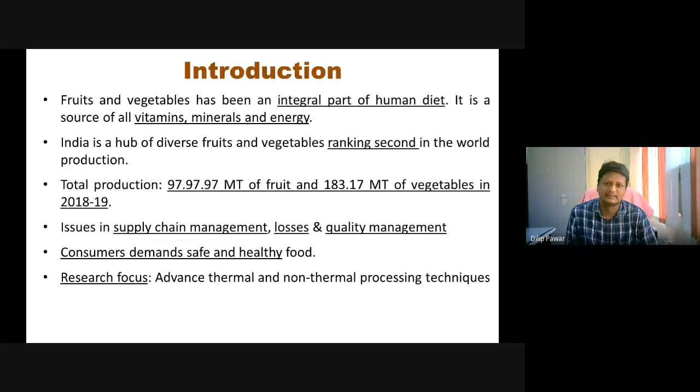In fact, this third sector of processing has gone to the quaternary level of processing, that is, extraction of high-value compounds from particular fruits and vegetables. And another sector can be waste utilization. This is the broad sector right after harvest where the fruit or vegetable can go.

Now, our topic of discussion is the business opportunities. As far as primary processing and the fresh consumption of fruits and vegetables is concerned, what are the business opportunities? One term is the cold chain. You might have heard about it. It is one of the projects, and I have some slides particularly on the cold chain. So there is opportunity in the cold chain. It includes the pack house, ripening chamber, cold storage, and storage at ambient temperature as well. So in the fresh consumption sector, one can have a business entity in these, that is cold chain, pack house.

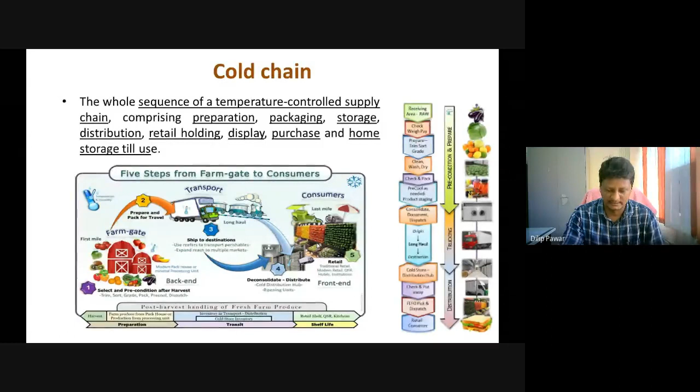Now, this is one scheme under PM Kisan Sampada Yojana. There are different types of schemes. You might have heard about them; some of you have been involved. Some of the schemes are Mega Food Park, Integrated Cold Chain, etc. Mega Food Parks have also been successful; many have been started. One of the schemes of PM Kisan Sampada Yojana is the Integrated Cold Chain and Value Addition Infrastructure.

This particular Integrated Cold Chain and Value Addition Infrastructure: the main objective is to preserve, to create infrastructure, to maintain the quality of the fruit throughout the supply chain, and to deliver safe food to the consumer. That's what it is all about.

As far as this cold chain is concerned, some of the operations are at farm level, as we discussed in the previous slide. Some operations are carried out at farm level, that is pre-cooling, weighing, grading, sorting, etc. These particular operations may occur at the pack house also.

Then there are the operations of multi-product or multi-commodity, multi-temperature storage, controlled atmosphere storage, packing facility, and individual quick freezing. This is a new concept, to preserve suitable fruit or vegetables by freezing them with individual quick freezing techniques. It also includes transport. During transport we also have to maintain low temperature, which can be done by reefer vans, mobile cooling units, etc.

So these are the components of integrated cold chain management, which was started under PM Kisan Sampada Yojana. The government is also giving subsidy, financial assistance, and training. I have some subsequent slides on that also.

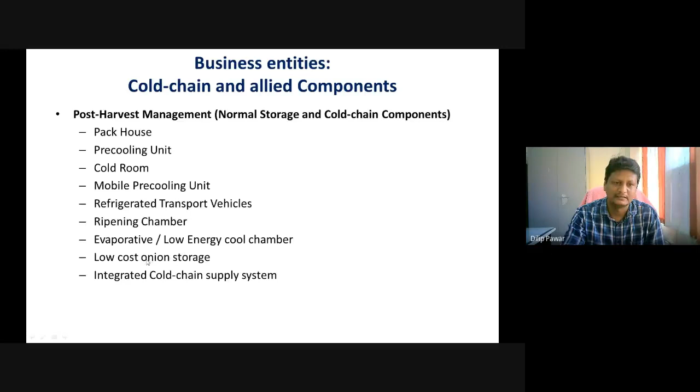These are the same components that we discussed in the previous slides. A business can be any one of these components, a collection of one or two components, or the entire supply or cold chain management. It includes the pack house, and I have some slides on the pack house also, pre-cooling, cold room, refrigerated transport, ripening chamber, evaporative cooling, low cost storage particularly for onion, or a combination of all these components.

So briefly about the pack house. We have the opportunity to start a business in the pack house also. A pack house can be started as a separate entity, or it can be integrated with the other components. A pack house simply means the operations carried out on fruits and vegetables right after harvest. It includes pre-cooling, washing, sorting on the basis of size, weight, color, length, packing, etc. So a pack house is the organized management of horticulture produce.

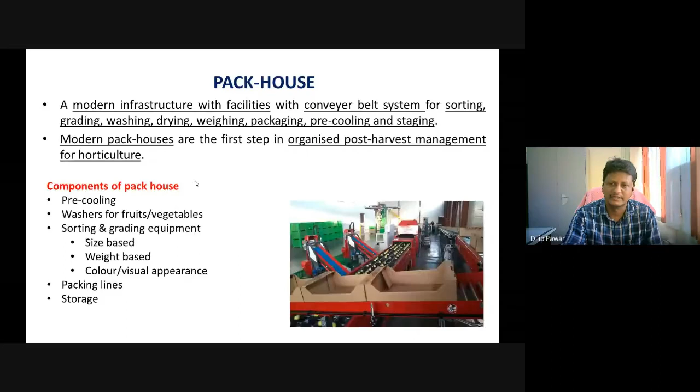Many advanced techniques are involved: automatic packing lines, weighing machines, sorting machines, etc. Many machines can be imported, and some are being developed in India also. We at CIAE Bhopal are involved in one project on the development of an automatic packing line.

So what are the unit operations taking place in a pack house, very briefly? First is receiving. Generally, if the production is our own, we can have our own produce, or one can procure it from the farmer. After receiving comes maturity assessment, then weighing, before packing and after packing.

It includes sorting. Sorting may be on the basis of surface defects that happened during handling, sorting on the basis of color, or grading on the basis of size. Many types of size-based graders are available, such as diverging roller graders and rotary graders, which are available in India also, but machines can be imported too.

Washing is also one of the operations of the pack house. Generally, washing has been done using chlorine. Chlorine is a disinfectant, but nowadays a good replacement for chlorine has come, called ozone. Instead of washing with chlorine, we can wash with ozone. So these are the operations.

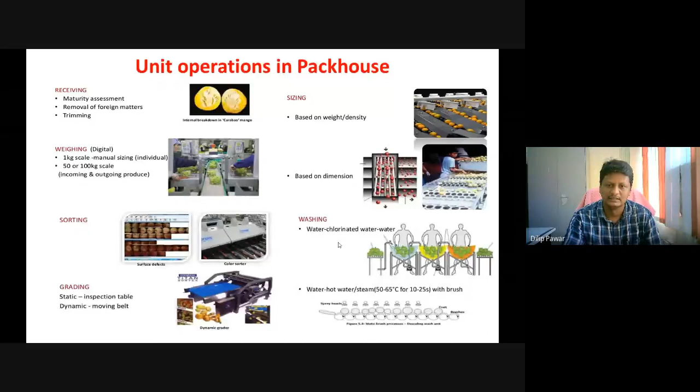Then waxing is the application of a coating over the surface of fruits and vegetables. You might have visited some industry or seen these operations. I will go somewhat fast through some of the slides, and later I have some slides on the technology developed on this aspect. Then conveying and packaging also. All these operations take place in the pack house.

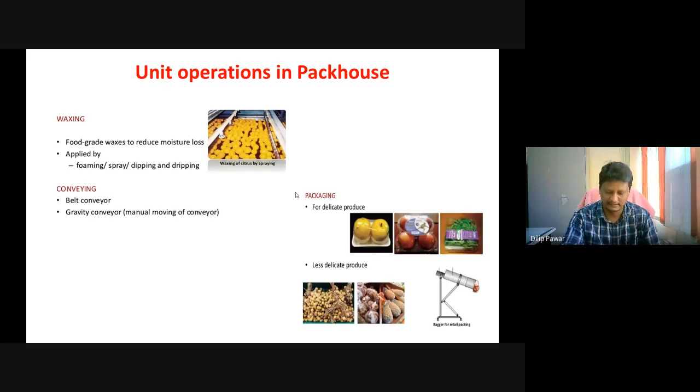At present, many pack houses are running in India. As per APEDA data, about 145 active pack houses are there in India. Mostly these pack houses are for commodities like grapes, pomegranate, chili, okra, and other vegetables.

Now, some of the unit operations related to this cold chain, or storage, I will be discussing. Pre-cooling we have discussed earlier. It means that right after harvest, the product has field heat, and this field heat has to be removed so as to extend the shelf life of fruits and vegetables. There are different methods of pre-cooling: shade cooling, room cooling, forced air cooling, hydro cooling, vacuum cooling, ice cooling, evaporative cooling. Shade cooling means simply that after harvest, if the farmer keeps the produce under shade or a tree, that is shade cooling.

Room cooling and forced air cooling: some industries are also providing such types of cooling systems. Room cooling, forced air cooling, hydro cooling, washing. Ice cooling is also being followed, particularly in the pack houses we discussed earlier. So pre-cooling is a very key treatment in extending the shelf life of fruits and vegetables, because we are discussing primary processing of fruits and vegetables.

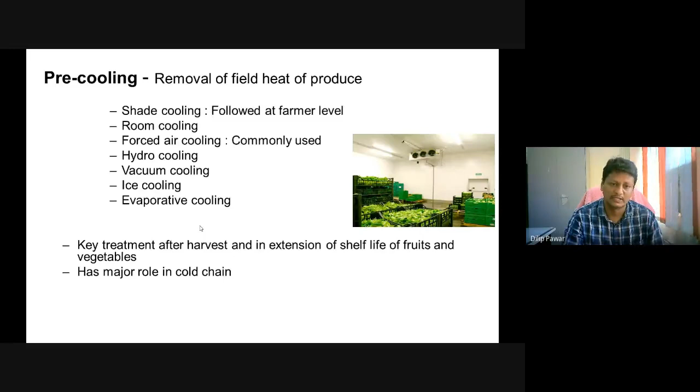In primary processing, most of the activities are about how to keep the quality, or how to keep the fruit or vegetable intact as it is. So what are the possible treatments we can give to the fruit and vegetable so that it can remain as intact or as fresh as possible? So pre-cooling is also one of the components of the cold chain project.

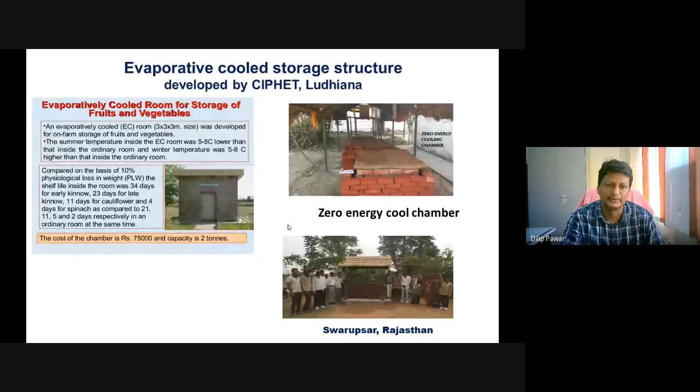Also, some ICAR systems or institutions have developed evaporative cooling structures. The left one has been developed by CIPHET, and the right one is the zero energy cool chamber developed by PUSA. These systems are also becoming popular. In fact, evaporative cooling requires tropical conditions like low humidity, high temperature, or high air velocity.

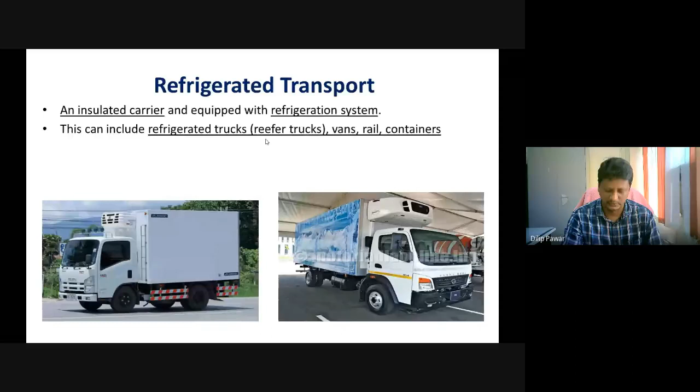Another component of this project, or the cold chain, is refrigerated transport. Refrigerated transport means maintaining the cold temperature during transportation also. It is an insulated system provided with a refrigeration system. It can include reefer vans, reefer trucks, rails, containers, etc. So very briefly, I am explaining what the components are. Then we will go to the next business entity.

The purpose is to have a holistic integrated approach in the supply chain, because at present our main topic is the cold chain. It is all about how to maintain the quality and the temperature for shelf life enhancement of fruits and vegetables throughout the supply chain. These types of technologies have been recently developed, so these are also important components of our project, or of the cold chain.

Now comes cold storage. Cold storage has been common for more than decades, and many cold storages are running. The purpose is to store the product for the off season. For example, we can store carrots in the peak period and make them available in the off season. It is generally long term storage, built as an inventory.

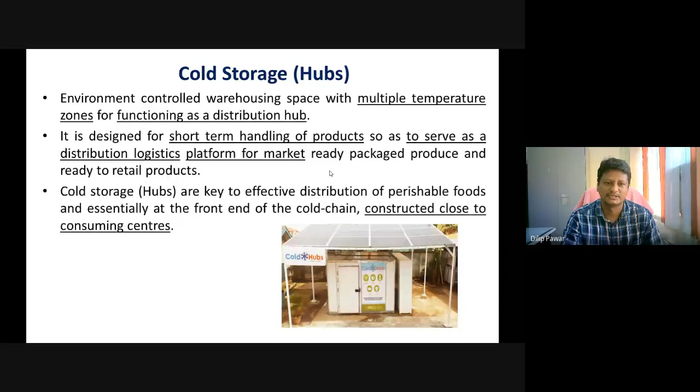Okay. Cold storage can be at center also, or cold storage at the hubs also. At hubs means at the distribution center. Very initially we discussed this cold chain: what is the process flow of cold chain? So this cold storage at hubs means storage at low temperature of the fruits and vegetables at distribution center, at consumer centers. So this is also one of the components.

Now, in general, it is recommended that there will be two possible business models in the cold chain. One is in the food supply and delivery system, and another is to hold the inventory in the off season. That is, this is simply storage, and this is simply supply chain. We can supply with having our own production, we can purchase and we can supply it by maintaining its quality. We can have the supply or trade of imported products also.

And another is simply storage. That may be cold storage or that may be ambient storage. For ambient storage, we have some other slides also; that time we will be discussing in detail. Now, as I very recently discussed, these are the schemes started under MIDH, Mission on Integrated Development of Horticulture, then Ministry of Food Processing Industries, MOFPI.

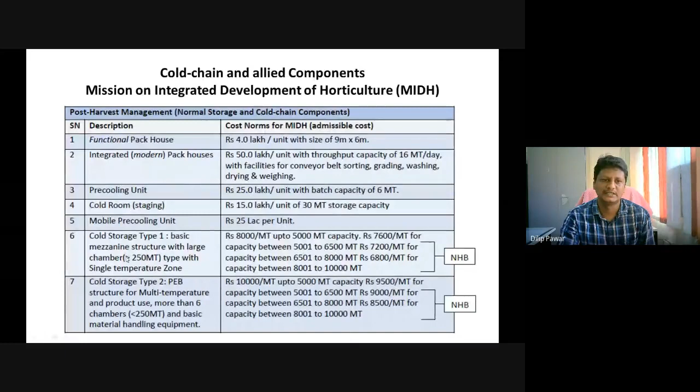So these are some of the cost norms. At left side in the second column, all these are the components of the cold chain, and they have also provided the maximum cost norms for a particular component and the possible subsidy for that. I am not going in detail of this, but such types of cost norms and guidelines have already been given by the MIDH and MOFPI also. It includes all these components that we have discussed in the previous slides: the pack house, pre-cooling, cold room, cold storage, different types of cold storage, different commodity cold storage also.

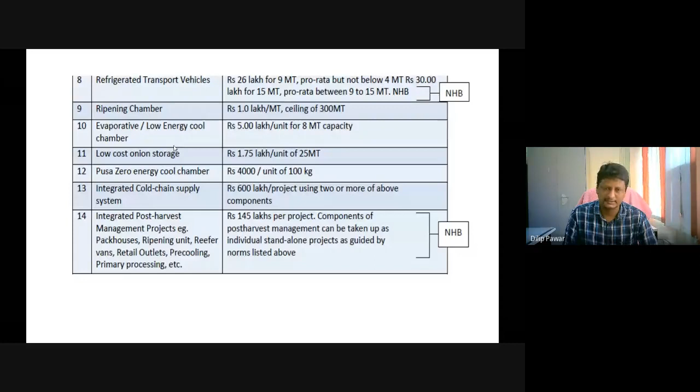One thing I forgot: whatever cold storages are there in India right now, most of them are single commodity cold storage. So nowadays the focus is on development of multi-commodity cold storage, because that is important. We have to have multi-commodity to make the business viable. It includes ripening chamber also, zero energy cool chamber also.

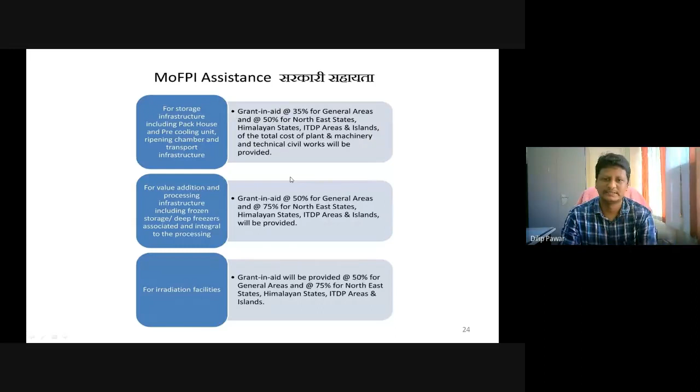Most of the components that we have discussed in the previous slides have been considered in these schemes. And there are different norms for the subsidy. Somewhere it is given about 35%, somewhere about 50%, 75%. So I am not going again in detail of the amount of subsidy. All the guidelines have been given by the MOFPI and by the MIDH also.

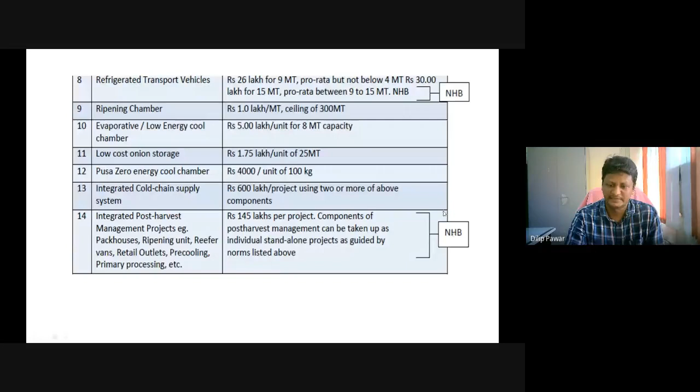Now, NHB, National Horticulture Board, is also handling some of these projects, because these are the slides where NHB is written. These projects are handled by the National Horticulture Board for providing the subsidy and providing the training. National Horticulture Board is providing training to entrepreneurs on two aspects. One is cold storage: cold room, cold storage, ripening chamber requirements. And another is PHM, primary processing of fruits and vegetables, that is mostly pack house activities. Now at present, NHB has approved 4 centers.

One is at CIAE Bhopal for training center. One is at CIAE Bhopal. One other is at CIPHET Ludhiana. One is in Baramati KVK also. And one is, I think, in Pune. Okay, so NHB suggests us to conduct the training to the entrepreneurs in these 2 projects.

One is PHM, cold room, cold storage, ripening chamber, requirement. Our theme is like that only. And another is the PHM, primary processing of fruits and vegetables. So we conducted our training recently in the month of February, from 17th to 22nd. We have conducted 1 week training. About 13 participants participated in this training.

All were entrepreneurs. Some of them are already having the cold storage, and they were in a position to expand the facilities. Some were very new, graduates, postgraduates, interested to come into the business. So we have successfully completed this training particularly on the cold room, cold storage, ripening chamber, and requirement. So this is one of the activities related to the business, and this is one of the activities of our

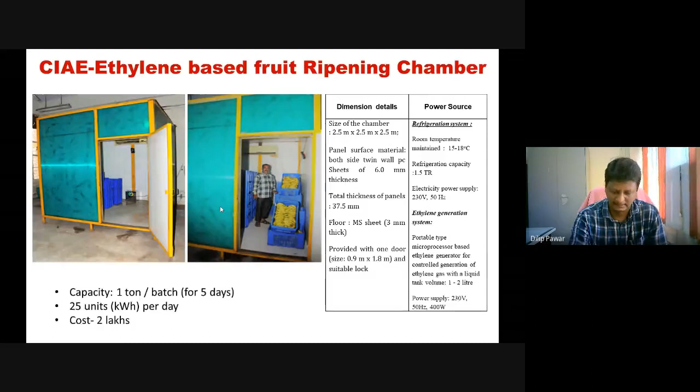Then the next component of possible business will be the storage. Okay, storage at low temperature. Earlier we were talking about the cold storage, so it is also storage, and this is the ambient storage. We can store some commodity at ambient conditions. A very good example is the onion, isn't it?

Because what happens is that during the peak production, the prices of the onion go down. Okay, again, particularly just 15 to 20 days before, the prices were more. And right now also the prices are higher. Okay, so there are fluctuations in the prices. So the sufferers are entrepreneurs, the farmers also, and the consumers also.

Okay, so one way is we can have the storage of onion for 5 to 6 months. So this will again do the same job, to give sufficient price to the farmer during the peak production, storing it for a particular time, and then making it available after 5 to 6 months. So like onion, garlic. Onion is the most probable business. So in this line, we have also at CIAE Bhopal carried out one project on the storage of onion.

Now, as far as the onion storage is concerned, right now also the farmers are storing the onion. Particularly, we have visited some farmers in the Indore and Dhar area. Farmers at present are also storing the onions. But in onion storage, the important thing is the aeration, how to do uniform aeration throughout the structure. So this is the key activity. Farmers were using aeration, but very extensively. Therefore, the physiological loss in weight was very high. So that was the issue.

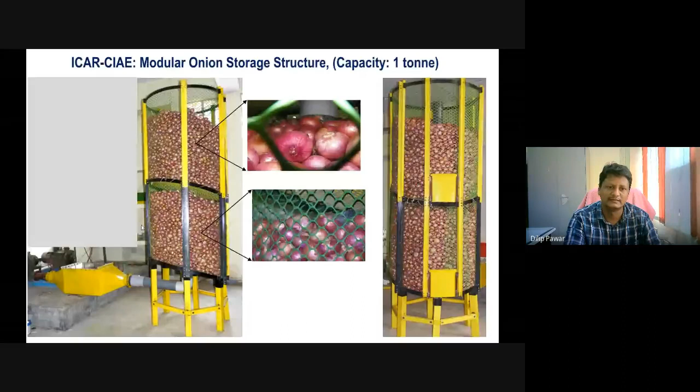Two things are novel in ours: one is the uniform aeration distribution system, and another is the fumigation. Because DOGR Pune has recommended sulfur fumigation can be done in the onion in order to have extended shelf life. And this aeration system is automated. We have sensors enabled here. On the basis of the humidity and temperature, when the temperature is more than required, the blower will turn on and off. So it is an automatic system, one of the features of this technology.

Then intermediate discharge, because during storage it is not like we store the onion at one time and after 5 to 6 months we remove it. In between it has to be removed. In between, the upper dry papery layer becomes dry, and that has to be removed. That is called the descaling operation.

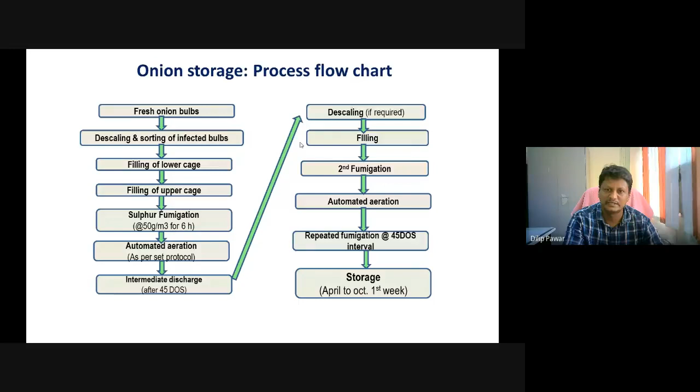Right now it is being done manually. We have also developed one machine for this. Then filling, fumigation, automation, etc. So this is the general flow process chart.

The losses that we are talking about: we found that in general the total loss in our system is about 22%, whereas at present at farmers' level it is about 30 to 40%. This is one other machine, the descaling machine. During storage the upper layer becomes dry, and that has to be removed, so it is a kind of cleaning mechanism. Earlier it was done manually, so we have developed this machine also. This is one of the components of this onion storage.

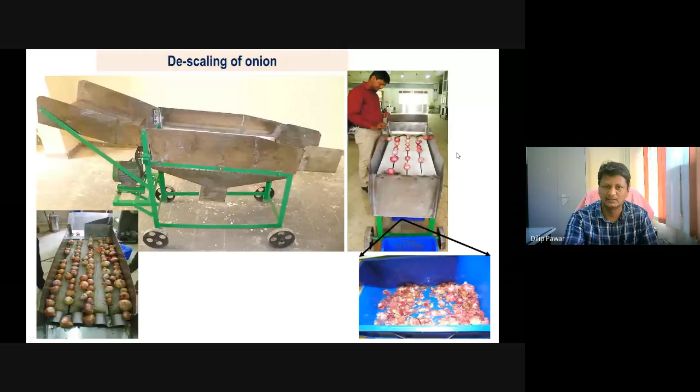So this is another one. This is the demonstration of our system. And this onion activity we have offered in our ABI activity also. Very recently we are talking about the ABI activity of CIAE Bhopal. One ripening chamber is there. Another is the onion storage structure. Earlier it was 1 ton. This 1 ton can be scaled up to 5 ton, 3 ton, etc. So we have developed one 3 ton onion storage structure, and we are offering this system in our ABI center. These are some cost calculations about it, because this is 3 tons.

The purpose of giving ABI means the particular entrepreneur has to come over here. You have to study, you have to learn, you have to find out what are the possible issues, what are the possible limitations. You have to learn the process, and then you have to go for the establishment of your own business. So for that we are offering it. These are some of the calculations about this 3 tons capacity. Per month we are charging about 2,000 rupees for the activity. It is based upon the calculations.

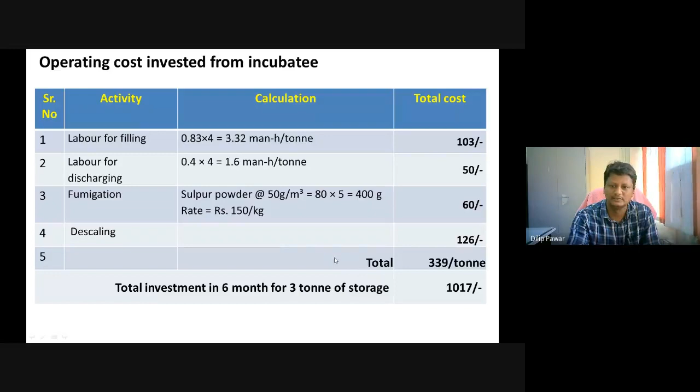These are some of our other terms and conditions, like what raw material he has to bring. Then he has to follow the regular facilities also. Very recently we have put this on the website, and many entrepreneurs have applied for this particular activity. Right now we are in the position to shortlist the candidates. We will be interviewing the candidates, and they will be using the facility. Now we will go to the next.

Next is minimal processing. This is also another processing activity of fruits and vegetables. The name itself indicates the meaning. Minimal processing means processing it minimally, and it is an emerging sector, because nowadays lifestyles are changing. Increased income, and changing lifestyle means we do not have the time. The families are nuclear. Both husband and wife are working, and in the evening we will cook the fruit or vegetable, making it ready, particularly vegetables for cooking.

So for that, what consumers demand is something that is ready to cook or ready to eat. Minimal processing is all about making the fruit or vegetable ready to cook or ready to eat. At present, in malls we are purchasing these minimally processed vegetables or fruits. For example, pineapple: the outer peel is removed, then it is sliced and packed in an attractive packet, and that is called ready to eat. Vegetables like cauliflower: the outer leaves are removed, and the florets are packed in a packet, that is ready to cook.

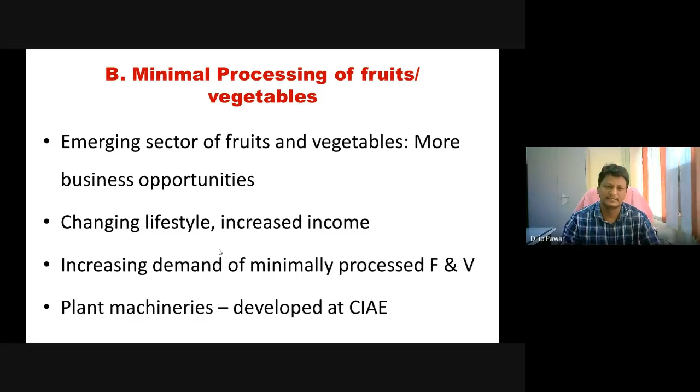Then comes cutting, peeling, or trimming. Then treatments. After cutting, we are giving the treatment, that is treatment with the washing. It can be given earlier. It is given by chlorine, but instead of chlorine, we can give ozone. Ozone is a good alternative to chlorine. I have some slides on ozone also.

Then after cutting, surface drying, washing, weighing, UV treatment. Filling into the pouches. After packaging also, cut vegetables are treated with ozone. The surface water is drained out, then it is sealed. After sealing, it is treated with UV, because UV is also a disinfectant. It kills many microorganisms on the package and on the product, and then storage or market.

Am I audible, sir? Hello. Yes, sir, you are. Okay. Just two, three technologies are remaining. I think we have completed more than half the time.

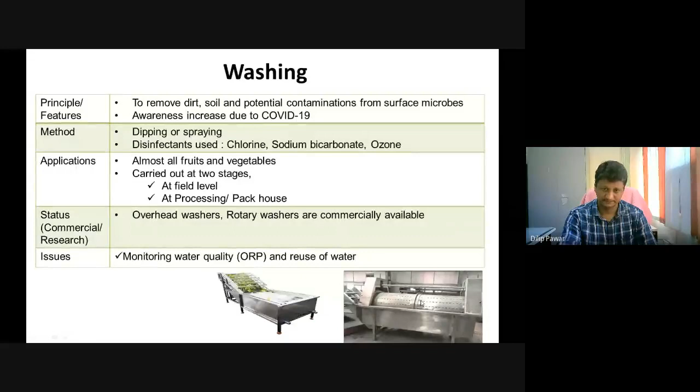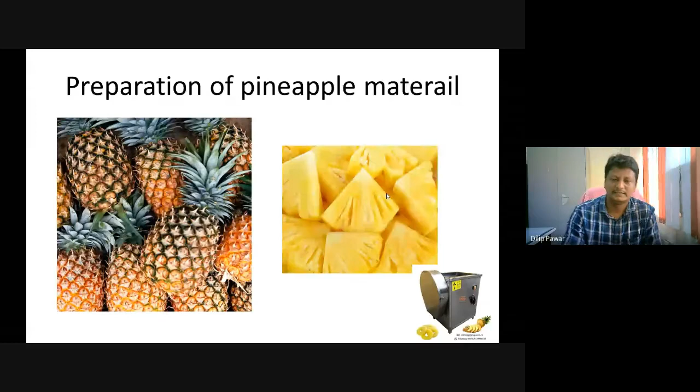It is suitable to cut fruit or vegetables in multiple ways. Carrot can be cut into slices, shreds, cubes, etc. We just have to change the disc. At the center there is a disc, and by using the suitable disc, we can cut the fruit or vegetable into the required form.

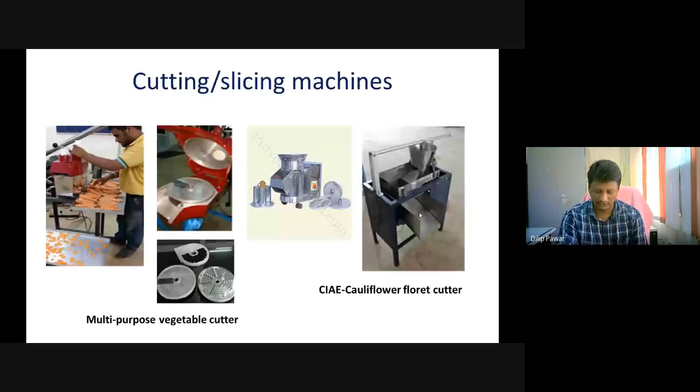One cutter was not available in the market, the cauliflower floret cutter, so we developed this right one, called the cauliflower floret cutter. It cuts the cauliflower into small floret pieces, which we do at home. So this is all about cutting. What we have discussed is pre-cooling, washing, preparation, cutting. Then comes treatment.

By this way, this oxygen can be converted into ozone, and then this ozone can be used as an oxidant in the gaseous form or also in the aqueous form, that is dissolving it into the water. So this ozone inactivates microorganisms, it removes the toxic substances, it extends the shelf life of fruits and vegetables. You will find many research papers that this ozone has been found suitable to extend the shelf life of fruits and vegetables. It also reduces a substantial amount of mycotoxin.

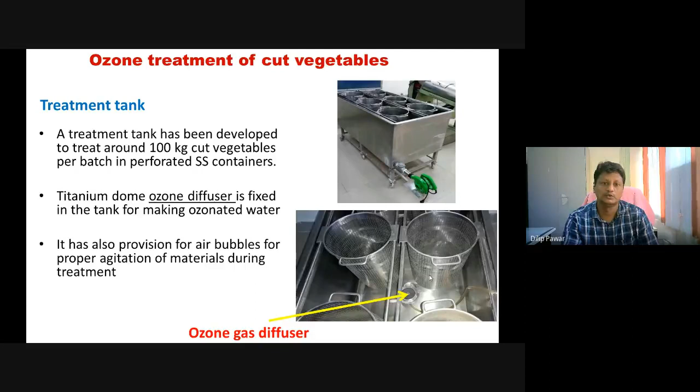Now, this central washing or treatment tank will look like this. It will have containers to contain the material. Overall, the plant is about 100 kg capacity. There will be water at the center. There is a diffuser through which the ozone gas will come, and it will dissolve in the water. So that water will become ozonated, and then the particular fruit or vegetable can be dipped into this container, into the water, and the particular treatment can be given. So this is the way of treating fruit and vegetables by ozone. I shall not go in detail about this.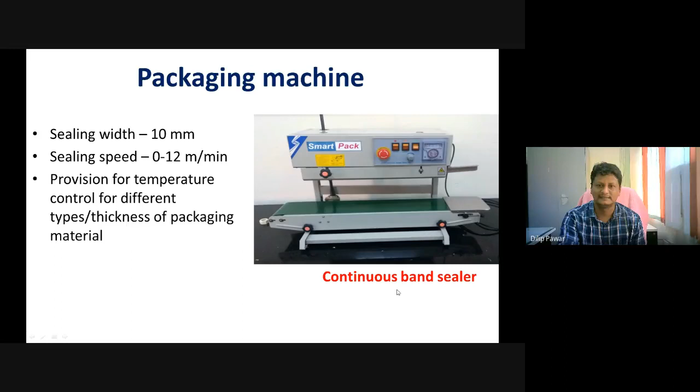And then the next operation is packaging. There are different types of packaging systems available in the market. Vertical type, continuous type band sealers are there, and we can pack it. After packaging, the next treatment is the UV treatment, which we were discussing very initially in the flowchart.

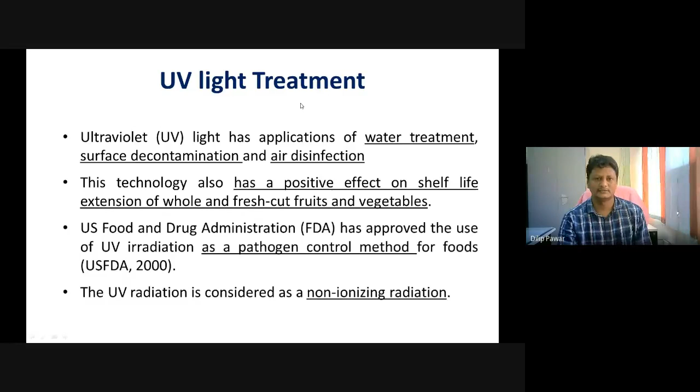UV is actually electromagnetic radiation, a particular spectrum of radiation, ranging from about 100 nanometers to about 400 nanometers. Again, it can be categorized as UVA, UVB, UVC. But UVC, having a wavelength of 200 to 270 nanometers, is considered germicidal. So it can kill many surface microorganisms of food, packages, etc. This is a green technology, like ozone is also a green technology. This can be used in the post-harvest handling or processing of fruits and vegetables.

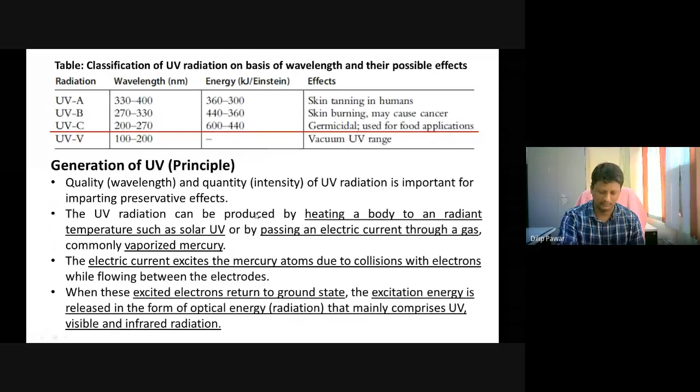This is the mechanism of generation, how we can generate UV artificially. UV has many applications, like hormesis. Hormesis means it will increase the immune system of the fruits and vegetables. It controls senescence, controls ripening. It can control color, disease, and maintain firmness. Many applications are there of UV.

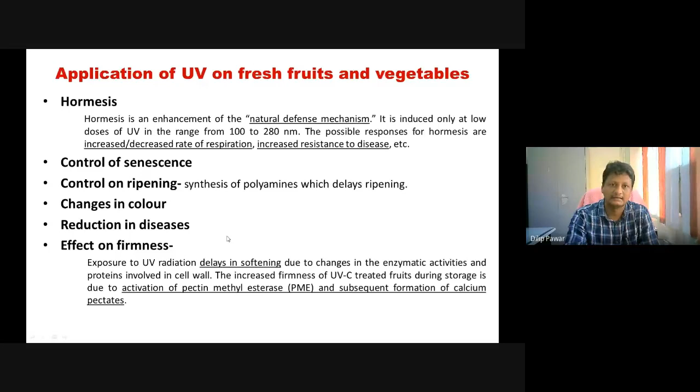Let me turn on the fan. Actually, I'll make the fan on.

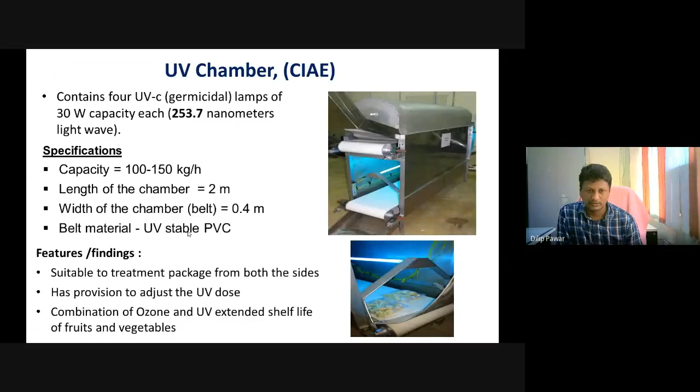We can adjust the dose of the UV light by adjusting the rotational speed or by adjusting the distance. This way we can give the UV light so that sterilization of the packet and the product occurs. These are other design specifications: capacity, speed, length, etc. of the UV lamp. This is the way of measuring the UV intensity. By varying the distance, we can have different intensities.

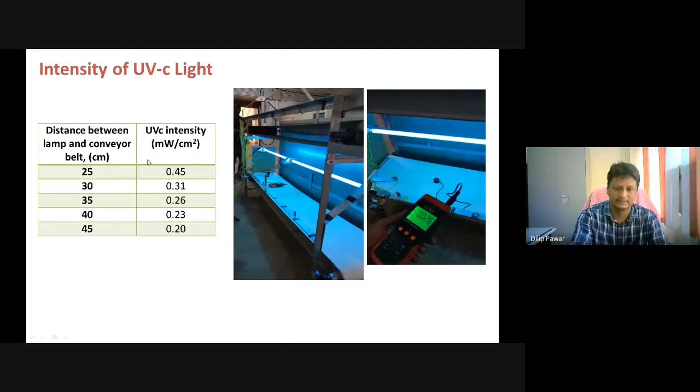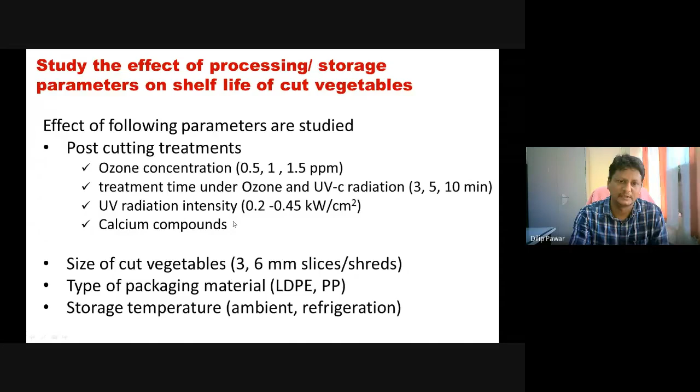Now, very briefly, I will go through the experiments. All these were about the machinery of this minimal processing, and these are some of our results of the experiments on ozone concentration. We carried out experiments at different concentrations, different times of exposure, different UV intensities, different sizes, etc. We treated with 1 ppm ozonated water and 100 ppm sodium hypochlorite for comparison. We have used different packaging materials also.

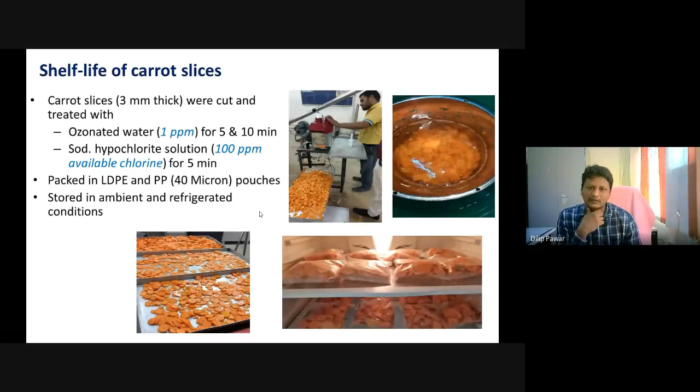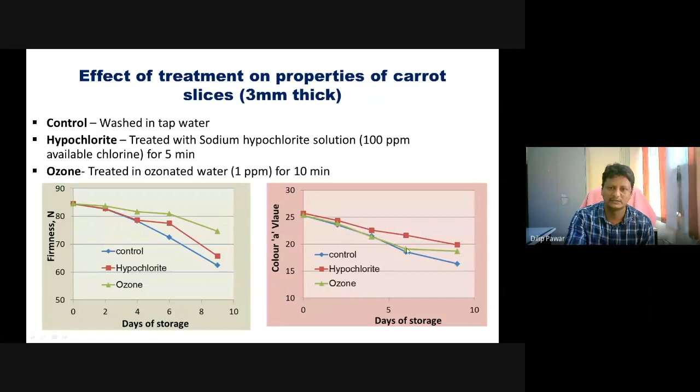These are our experiments on carrot. Carrot converted into slices and treated. In this case we are doing the reverse thing, because by cutting we are removing the natural protection. So how many days it will retain is important, and that study we have carried out. Firmness can be retained well; in fact, firmness with ozone is superior to the control and the hypochlorite treatment. Color was better for hypochlorite, but more than the control sample. This is control, this is chlorine, and this is ozone treatment.

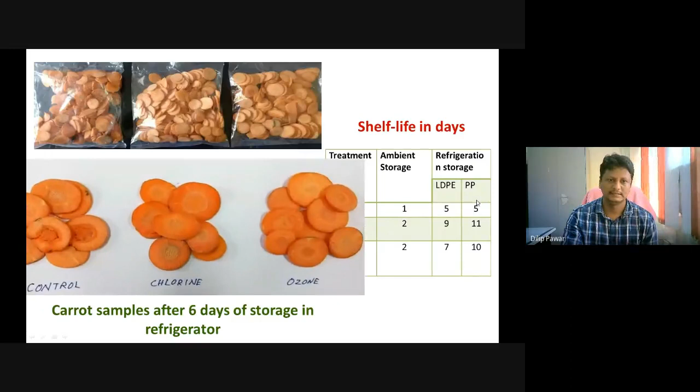In general, we found that after cutting and minimal processing, products with ozone treatment can be kept about 11 days in polypropylene, about 2 weeks. These are some of the experiments, very briefly. In a similar way, we carried out experiments for cauliflower, and found in general about 14 days shelf life after cutting and minimal processing.

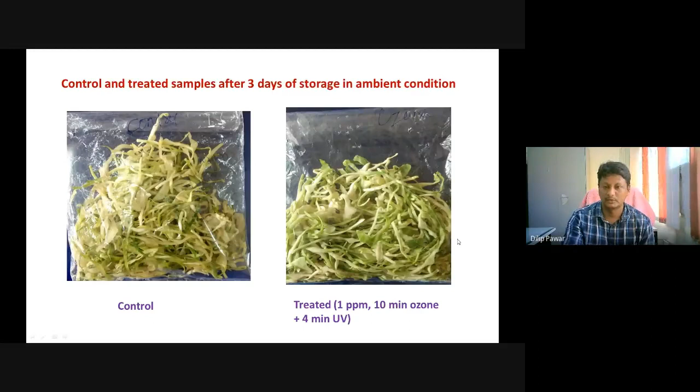We carried out cabbage shreds too, and found about 2 weeks shelf life. In the control, browning will occur. This is treated with ozone and UV. So a combination of ozone and UV will further extend the shelf life of a particular fruit or vegetable. So this is all I have discussed about minimal processing: the process, the different machineries, and some of our experimental findings.

As far as business is concerned, this is a very good business. Because of changing lifestyles, there will be a growing market for minimally processed products, particularly in urban areas, where families are nuclear and all members of the house are working; they will want ready to eat or ready to cook. So in coming days this is a growing business. For economics, this plant has a capacity of 100 kg per hour. Overall capital investment is about 10 lakh. Working capital is about 5 lakh per month.

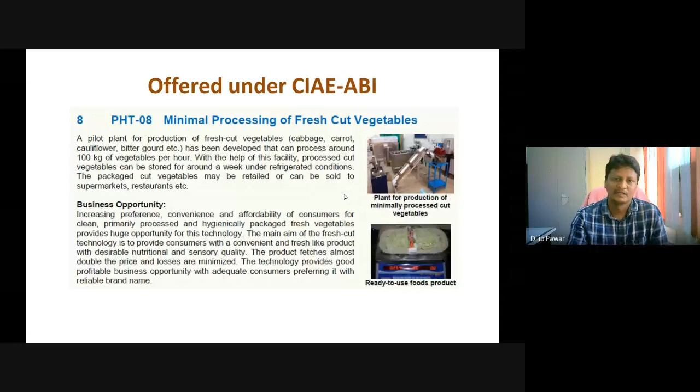This particular project has been offered under ABI activities. Recently, some entrepreneurs have applied for this business, and we are shortlisting and interviewing the candidates, and then offering this facility to the entrepreneurs. Happy to say that this has already been used by one entrepreneur in Bhopal for about 1 year, and now he is in a position to start his own business. So this activity is also involved in the ABI.

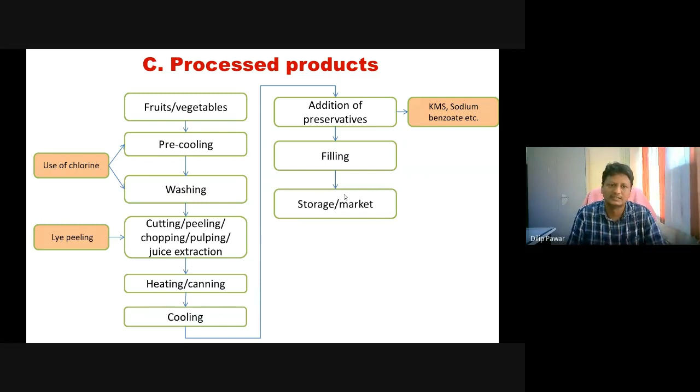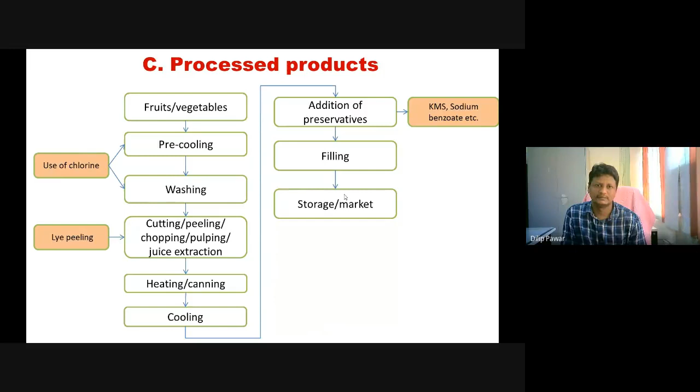That is canning line, preparation of jam, jelly, etc., pickling line, then dried products and extraction. Okay, drying we can consider it as a primary also or secondary also. Okay, now we are almost at the last sector or last handling operation for these fruits and vegetables.

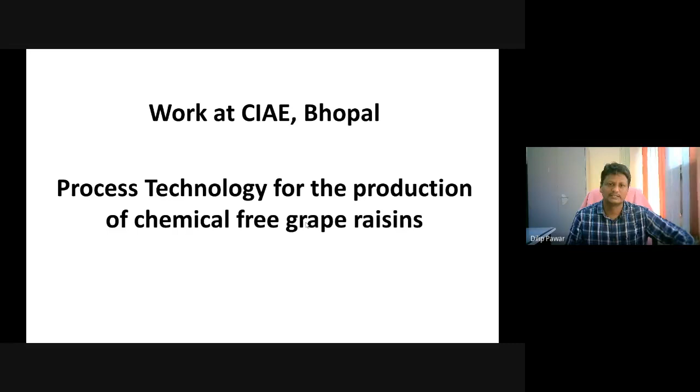Another way of preserving fruits and vegetables is the drying of fruit. So the purpose is to preserve fruit, and to make the product available in the off season. Generally grape drying, plum drying, vegetable potato slices, moringa leaves, etc. are the products that are dried. In line with this, we have carried out some work at CIAE Bhopal on the process technology for production of raisins, chemical-free raisins.

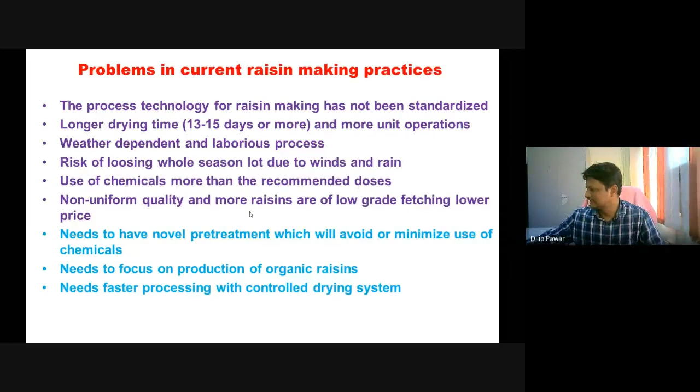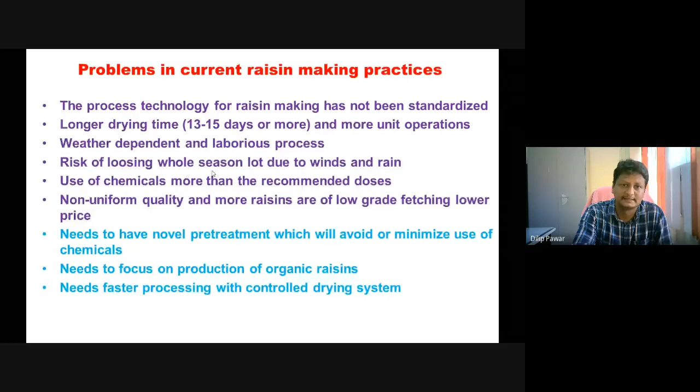You might have heard that at present the raisins are prepared by use of a chemical process. That is, grape bunches are dipped in a chemical, then kept for drying. In general, the drying time is also longer, about 13 to 15 days. And as far as grape is concerned, so many chemicals are used during its cultivation also. Then the number of drying days required is also higher. So there were issues, and we thought, can we avoid them.

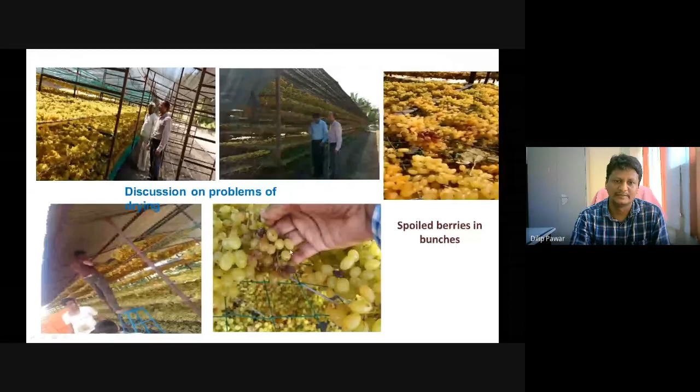The export of India's raisins is very low. Then there are issues of cap stems, etc. So we also carried out a survey. They are using the chemical ethyl oleate and potassium carbonate, dipping the grape bunches in this solution, then keeping them for drying. The use of chemical was intensive. There were no guidelines, and the drying time is also higher. Some spoiled berries are there, and spoilage will spread. Intermittently, that also has to be spread.

After drying also we saw that whatever chemicals they were spraying or dipping were depositing on the surface of the raisins. Sulphitation is being discouraged, but still it is being used in the process. So in line with this, we thought, can we avoid this use of chemicals. As an alternative, we have developed a chemical-free process. Recently we completed this project. We have avoided the use of chemicals in this entire process.

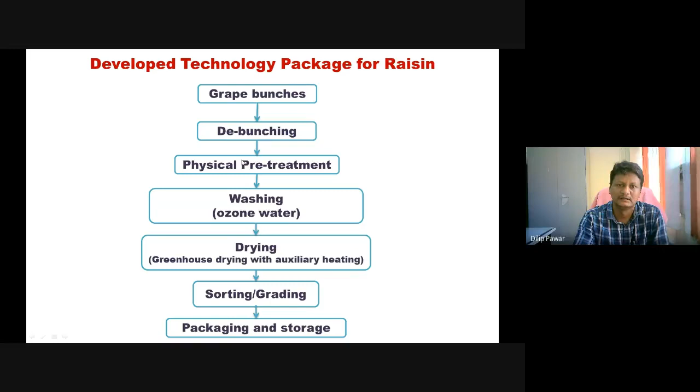Our process is different. This is the overall process, and this particular activity is also there in the agribusiness incubation. Initially, we are debunching the grapes. For that, we have developed one machine, in such a way that the intact berries will be separated. The grapes grown for raisin purpose have higher Brix and are thin in bunches. So debunching will be there.

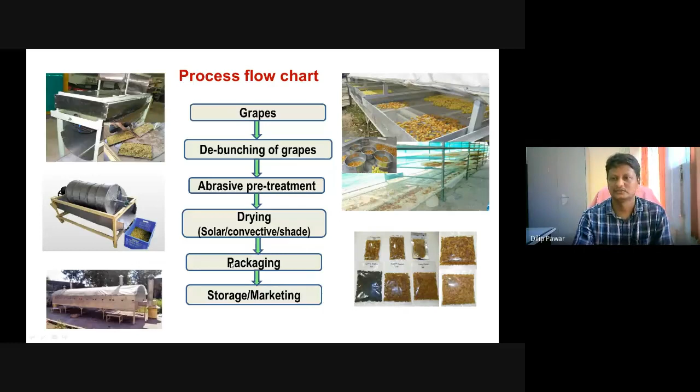Another is the abrasive pretreatment system. Because on the surface of the grapes there is a waxy layer, natural drying will not occur. So as an alternative, we have developed another machine. Then drying: we carried out drying in solar dryer, sun dryer and shade dryer, and evaluated the quality. This is the entire process. There is no use of any chemical. We found that the drying time is reduced by 30 to 40%.

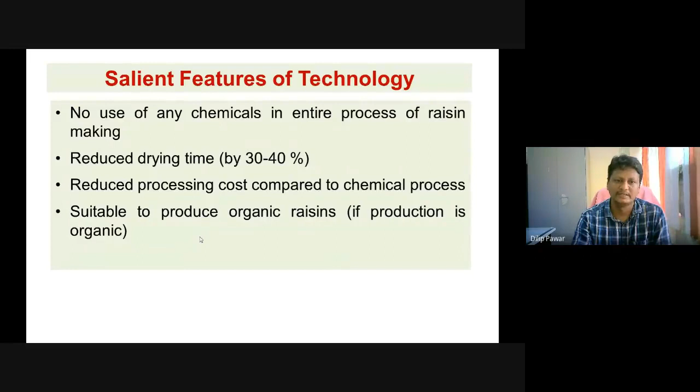Because chemical cost is reduced, the processing cost may go down. And if somebody is producing organically, the final product may become organic. This chemical-free process is also offered in the CIAE ABI Center, and it is being handed over to entrepreneurs to study the process and then start their own business.

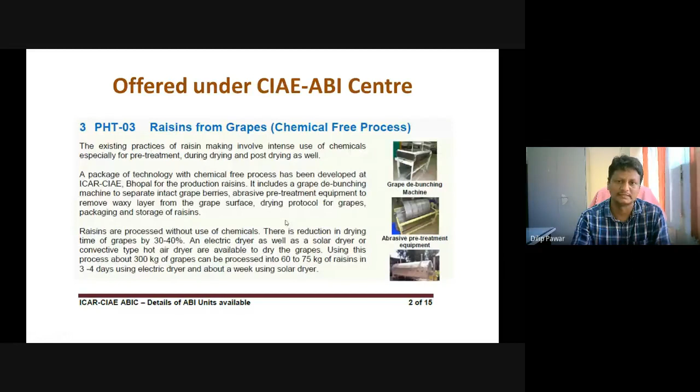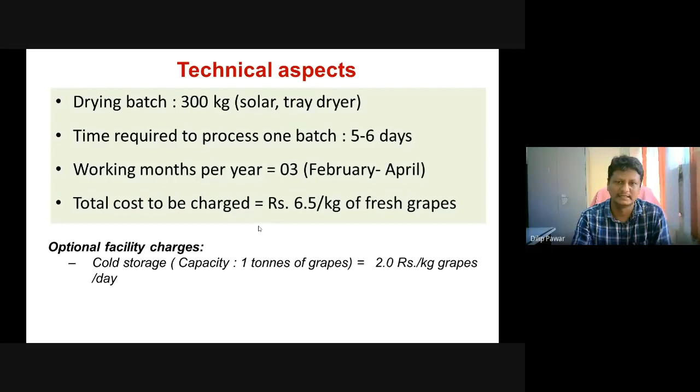So with this, let me sum up. Very first, we discussed the introduction. Then we've seen the possible operations after harvesting of fruits and vegetables. What is cold chain? We discussed opportunities in the cold chain and different components of the cold chain.

Then government initiatives or subsidies being provided for the cold chain, MOFPI, then MIDH, etc. Then we also discussed cold storage, then training activities on cold storage and the associated activities. Then we discussed the ripening chamber and the opportunities in ripening. Then we also discussed storage, particularly onion storage and business opportunities in onion storage.

Then we discussed one emerging area, that is called minimal processing. What are the plant machineries? What is the process? What are the novel techniques like ozone, UV, etc.? And at last we discussed one drying project, that is preparation of chemical-free processed raisins.

So in general, opportunities are there. One can have a business in the supply chain, cold chain. One can start their own activity, like a ripening chamber alone, or one can have the whole supply chain. And storage, cold storage is also there. Training is also being given on cold storage, and this cold storage activity is being encouraged by the government. Many new entrepreneurs are also in a position to start cold storage.